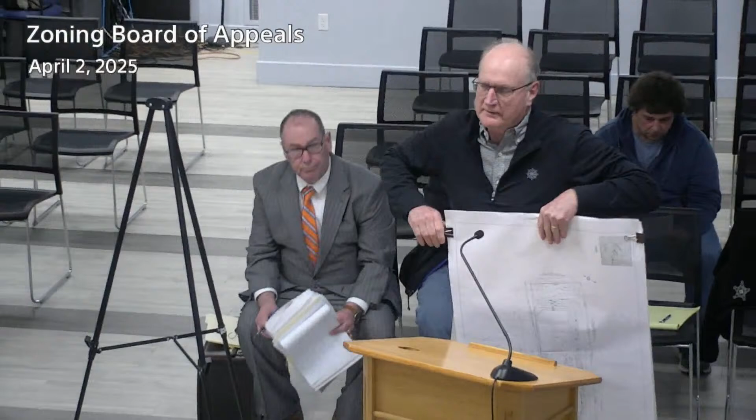But has that already been removed? Let me just give you a quick little update, and then I'm sure you'll understand it a little bit better. So just for the record, Mr. Chairman and members of the board, my name is John Glossa, Engineering, 46 East Street in East Walpole.

So the first sheet of the plan set, even though it's dated recently, is the plan that was approved by the board back 2 years ago or so. As you can see, this was the limit of the level area, and then this was the sloping shown on the plan. That was the 2,200 or whatever it was, cubic yards of material to be removed.

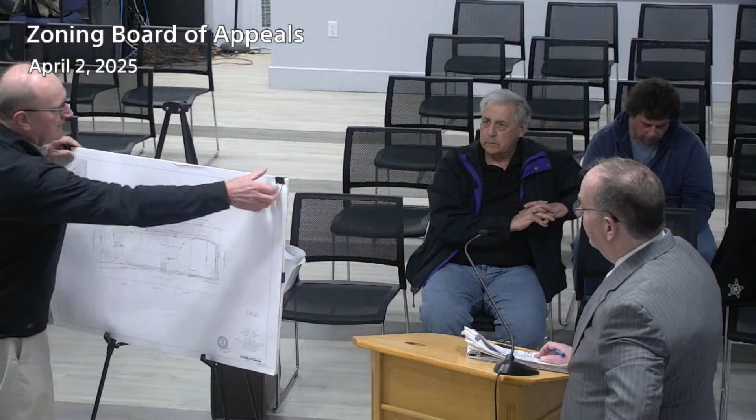So let's just be clear, this is not the existing conditions right now. Is that correct? No, this is the existing conditions, right? So sheet 3 is the existing conditions right now.

Okay, and what sheet 3 is showing you is in that shaded area here. That's not the property line. That's the area that now essentially is level, is flat. And that's where the other 1,000 and whatever it says, 1,100, 1,200 cubic yards of material came out.

So 28 yards in a trailer dump, 42 extra trucks. So it took about 84 trucks to get out the first sheet that you saw. It took another 42 trucks. So now this is the level area.

This is not constructed the way it's shown here, but under the regulations of the Conservation Commission agent, under the land disturbance regulation, what we need to do is store 1 inch of water from the disturbed area. This is sand, that's why Lopes was in there grabbing as much as he could, it's like beach sand. So 1 inch of water will go into the ground, and it's all sort of contoured to go to that area.

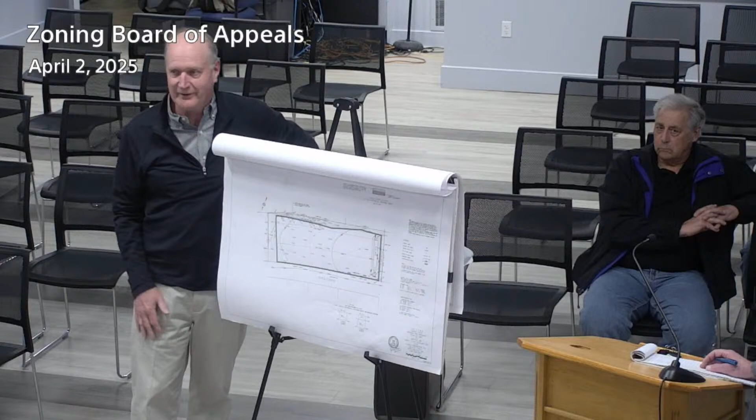But this, other than the basin, because this basin has to be a little bit bigger than the one on the original plan, other than that, this is what it looks like now. So there was 2,200 allowed, and there was about another 1,100 or so that were taken out without a permit. Right, so that actually isn't the biggest issue, we can fix that.

The problem is now that you have a slope that's 12 feet, a 12-foot high slope dropping over about 16 feet. And it's right next to the apartment complex. So this is going to require a retaining wall and a fence at the top of it. And I don't see either of those on this plan.

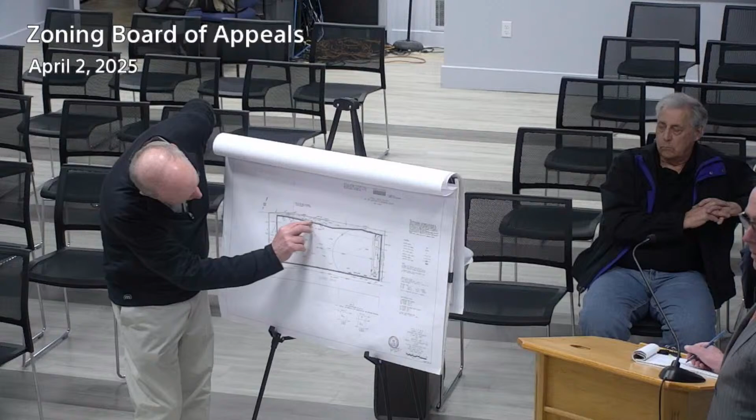Do you have a retaining wall on this plan? Yeah, there is, can you see it? It's right here. Existing concrete block, it's only from here to there, it's only small. But it's not all of it, he had started it, Mr. Chairman, and Jim Crowley had gone out, I think that was back in, what, July?

Or December or July? December. But Jim had gone out there at the time, was concerned, and then it totally stopped.

Yeah, I was over at the preserve and I saw the fence is a wire fence with staked in metal poles. And this is abutting an apartment complex that goes right up to the wall. And so we're going to need to see the retaining wall, how it's going to be built, on both sides, because I do see the existing concrete block, but those are just dropped in place.

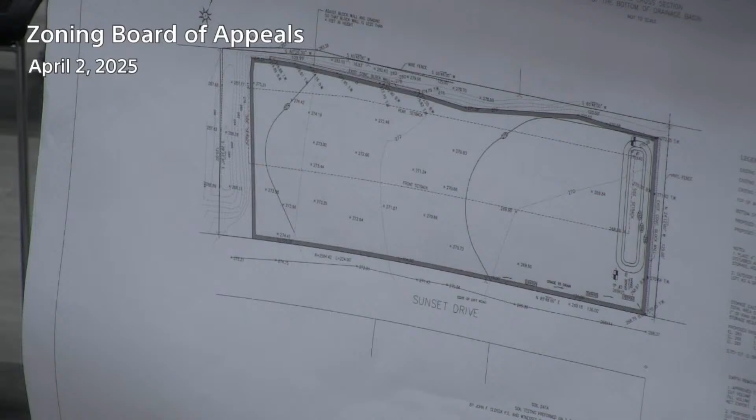And then also a fence on the top that's going to protect people from going over that slope. That's a big drop. It's not allowed. Your request is certainly very reasonable.

So yeah, we'll show that, we'll show specific details of what those will look like. And we'll show you some cross sections of the slope at different places, so you'll be able to see what that looks like and determine whether you think that's adequate or not. I think if you design it with a retaining wall and fence at the top, so it's protected, I think we could see that, that would make sense.

Do any other board members have anything that they want to see on this?

I just had a question. I'm trying to go back to when this was before us, and if I remember correctly, it was for storage of empty dumpsters. So, I'm not anti-business, I'm just asking, because it was for storage of empty dumpsters, and now we have, right on the plan, materials, supplies, equipment, and manufactured products in the storage area. So is this a storage area now, or is it retail? You've got loam and mulch on the plan, but was that the plan all along? I really thought it was going to be an enclosed facility, there was so much fuss about storing empty dumpsters. Can someone explain that?

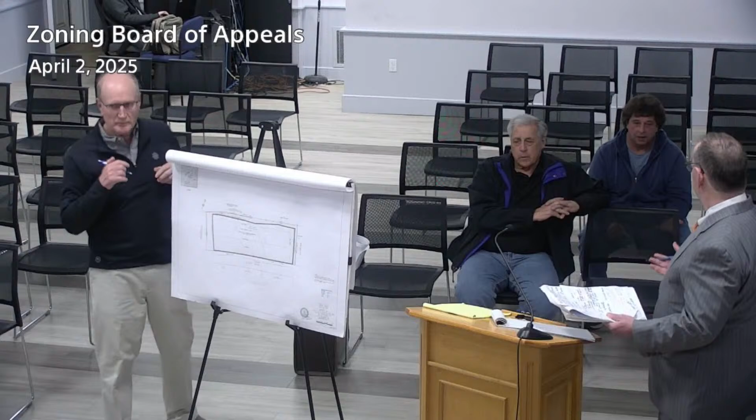The dumpsters are still the primary business, right? No, I know, I saw them, and Tony has a landscaping business too. Okay, all right, I just want to make sure we're talking about the same project. I envisioned this massive space to be storage of empty dumpsters.

Like I see on 495, all of a sudden there's storage of empty and clean outhouses, massive numbers of them with no fencing. So down 495, that's what you see, hundreds of them. So I thought this was going to be strictly dumpsters. So is it a retail operation now with selling of mulch, or is it just storage for his landscape business?

Just storage. Okay, all right. In the words that we put on the plan, we just took that from the zoning. That's right. It's not necessarily everything that's written there.

It's what Attorney O'Connell told you it's going to be, which is the dumpsters, because they have two businesses: landscaping, affordable landscaping, and affordable roll-off. So one's landscaping, but it's mulch, sands, gravel, things that landscapers use for supplies. If you want us to have the plan match what Attorney O'Connell told you, we can do that.

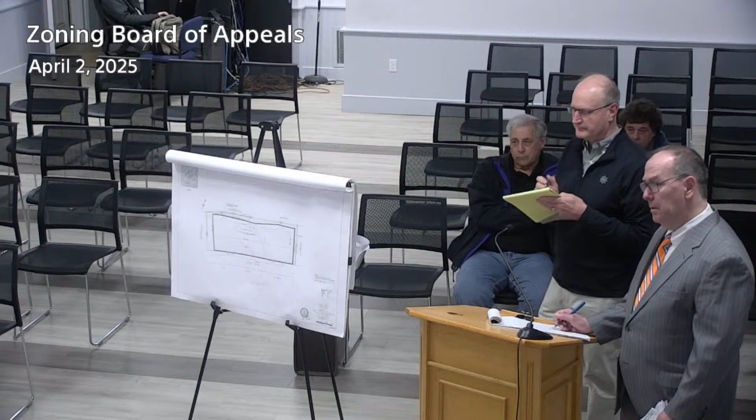I just had the draftsman do this for the purpose of getting it in front of the board, because Jim Crowley was putting a little pressure on me to get something in front of the board. I just used the words right out of the zoning, but we can specify exactly what it is on the plan. Well, I would like to see that, because when it's on the plan, we're going to approve a plan at some point, it's a new plan. If it's on the plan, it's what you can do. It's not what we said here that you can do if it's not on the plan.

Will this require any additional signage? I didn't see any. No signs, I didn't see anything. Are they going to come back and ask for any signage? So it's going to be a storage, yeah, it's just sort of a private storage. Okay.

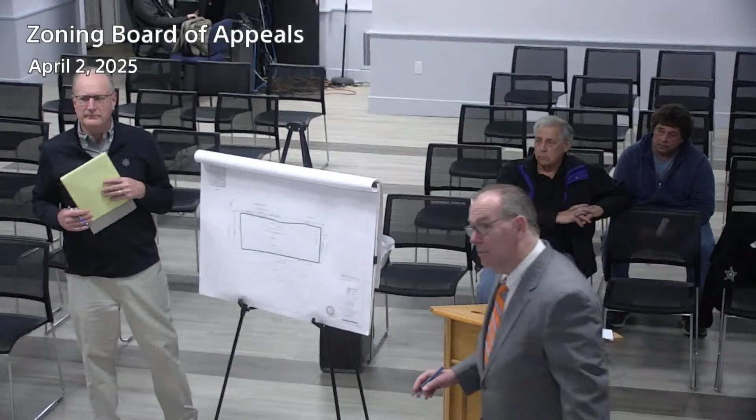And these are just concrete pads, is that what these are going to be? The material stockpile area, or is this? Are you saying we're showing something? I think it's just marking a location on the table already, the last page. No, on the last page, the construction staging area, material stockpile area, that's just, yeah, on the next page you'll see it. On the details, sheet 4.

Oh, no. So, I mean, this plan's probably a little bit moot, but the current regulations, even of the Conservation Commission, the current land disturbance regulations, whether local, state, or federal, require us to show two things: a stabilized construction entrance. So, how are the trucks going to get in and leave without tracking sand, dirt, and silt all over the paved roads? We show it here, this is not a paved road, it's a dirt road, but the regulations don't say if it's a dirt road you don't have to show it, so that's all that is.

During construction, you have to have a material stockpile area. So if you had some material like loam that you were going to take away to get to the sand, but then put it back, you stockpile it somewhere. Same thing with your equipment—you're supposed to show where you're parking your trucks, your excavator, your front-end loader. They're just trying to control stuff so when they go up to the site, or a neighbor asks about it, things look under control. It's pretty much standard operating procedure, so we just automatically draw that plan.

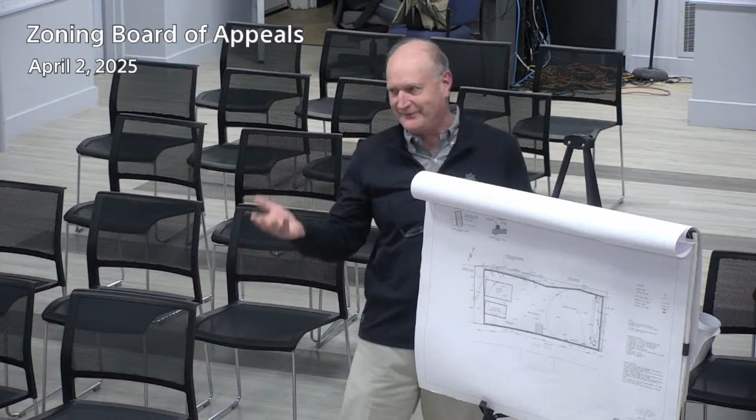These aren't concrete pads, no—they just sort of go away once construction is done. It's kind of moot because we're showing you stuff that should have already happened, been there when they were taking the 1,100 cubic yards out. That material is gone now, but we still follow the procedure.

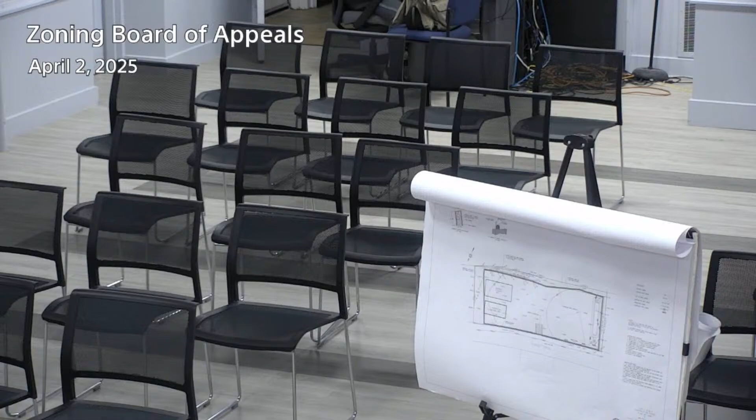So are there other things that board members want to see? We've got fencing and also a retaining wall, and how that retaining wall is going to support, because this goes—I don't know, my guess is it goes pretty close to the property line—the excavation that's already taken place.

I just have a question, and I understand construction, but what was the reasoning behind exceeding the original scope once you got out there and started ripping into it? Why did you have to go so much further? I understand this was approved, you go out, start site work, and anything can happen once you actually start digging and getting into it. I'm just curious, not that it'll sway me one way or the other, what the reasoning was behind going so much further into the property line and making it so much bigger.

I'm not even sure the original area to excavate was denoted as the major area, but I think it was just a matter of the additional trucks that were hauled off. We definitely understand your concerns, but as far as a specific location, I'm not sure that was specified initially. Oh, I'm sorry, yeah—it is on the original approved plan.

I know that was the dreaded question we were all trying to avoid, and I'm not trying to be difficult, I was just curious if there was an actual reason it had to be so much bigger, deeper, and wider than originally approved. From what Civitarese told me, Lopes gets in there with this huge front-end loader and trucks coming in, putting pressure on them: come on, let's just finish the rest of it. After a while they caved to that idea, which was not good. They should have called me and we could have quickly come in front of the board with new plans and gotten it done, but it didn't happen.

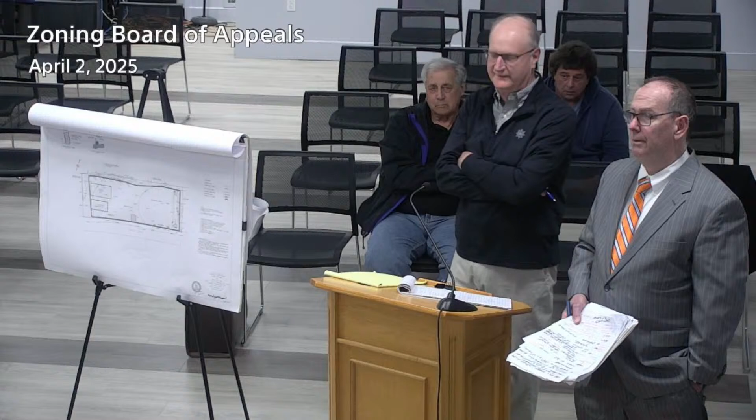I understand, yeah, that's the way it happened—you get the contractor in there, and I'm not blaming them, but that's their business. They get in there and think, why are we stopping here, let's take the rest of this, and they put pressure on Tony, and eventually he caved. But it's a big mistake—should have just called me, it wouldn't have taken that long to get these plans in front of the board and do it right, but it just didn't happen.

So you'll come back with revised plans showing the retaining wall engineered in, and fencing around the top.

And a list of items that are going to be stored on this site. Tony and Tony are going to stick to it. The contractor did not come back, but it's still nice to see it, right, to your point earlier.

I just have two quick things. Going to Dave's comment, people get a little carried away and start going a little further. I had a conversation with the building inspector, I thought he might be here to address it. This was a year or so ago about another project.

When the zoning board gives a special permit, we're basically giving the applicant the special permit, and there's no oversight by anyone, the town engineer, that I'm aware of, to count the trucks and keep it legitimate, keep everything on the up and up. And I find that a problem.

There's a couple of things that have happened recently where it's like you really question how much did they go over. I know they have to give an as-built when they're done, but the whole time a project's ongoing, it's like there's no oversight. Crowley had brought something to town meeting several years ago. He said that just didn't fly, but he wanted more oversight attached to our giving a permit. When he issues a building permit, he has an inspection.

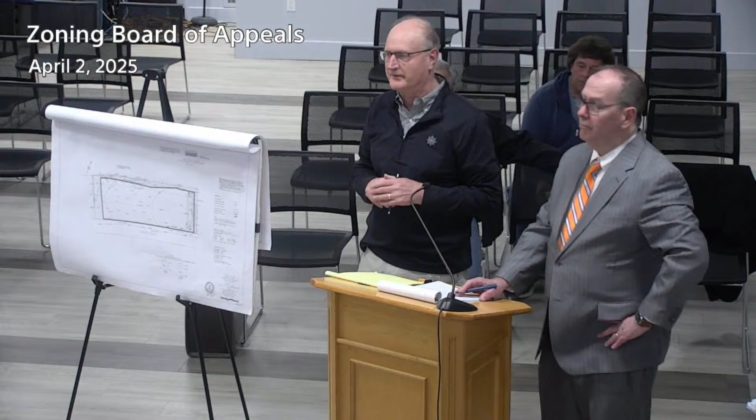So when we do that, for soils like this, we use 5 inches of rain, or 5 inches of runoff, and that usually comes out about right. So if he paved it, this would be like 5 times bigger. It wouldn't look like that - it would probably be like Cultec or something under the ground, so it gets a lot bigger, to answer your question, if it was paved. Right now, it's just gonna go into the ground.

My final question: how do you control what's washed out of those dumpsters, even though they're clean? No, the dumpsters don't get washed out there. The rain - there's nothing in those. Oh okay, they're cleaned before they come there. They're clean, I've seen them. I'm not saying I've been in them, but I've looked in them. There's nothing in those dumpsters.

There's no trash, there's no liquid, there's nothing. They're clean. You bring them somewhere, and they bring them to a facility where they're emptied and cleaned, and then they're just stored here - there's nothing in that dumpster, cleaned out. That can also be a condition. I will make sure the plan says that. You can make sure your permit says that, but we'll actually add that as part of the list of what they're gonna do, that these are clean dumpsters with no trash, liquid, nothing.

How long is it going to take you to get a revised set of plans showing the retaining wall and fencing? I would say a week. Okay, what's our next available? May 19th? Okay.